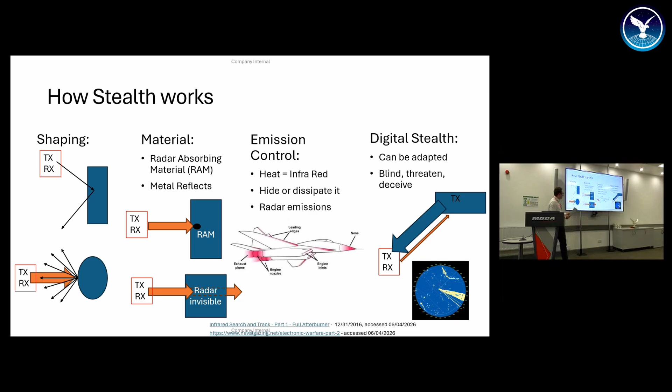And then we get to digital stealth, which is moving away from physical now. This is quite interesting because it gives you the ability to adapt. If you imagine you're in a dark room and someone is shining a laser at me, if I were to shine a bright torch back, you don't know how far away I am, you know the direction, but you can't range me. Or the only way that I'm going to find where you are in that room is where you're shining that laser from. So if I threaten you, you've got to switch it off. And therefore, you can effectively stop people from seeing you.

Why is this happening anyway? Because if we go back to World War II, radar improvements were advancing so quickly and so well that the 1946 Kármán report in the US said there were no means possible by which an aircraft could be rendered invisible to radar. Yet by 1960, when Francis Gary Powers got shot down in his U-2, conventional methods of beating surface-to-air missile threats were failing. So the CIA and DARPA launched an investigation.

The CIA did this during the Cuban Missile Crisis. They wanted to know how big something had to be for a Russian radar to pick it up. What they did was take metal balloons and launch them from submarines off the coast of Cuba, and monitored the Russian response until they picked it up. Then they knew how big something had to be. That, along with DARPA running trials with radar absorbent materials and on the shape of aircraft, allowed them to come to a figure.

However, the issue here is that, say we were detected 200 miles away normally, and we want to limit that, so they can only detect us at 20 miles. That is a 10-time decrease, but requires a 10,000 times decrease in radar cross-section. That means making an F-15, for example, look like half the size of this piece of paper, which is not easy.

In order to do that, many manufacturers were still using clay at the time, or wood, to model prototypes, but computer modeling was the key. But to do those models, you need the mathematics behind it. And the mathematics come from Russia.

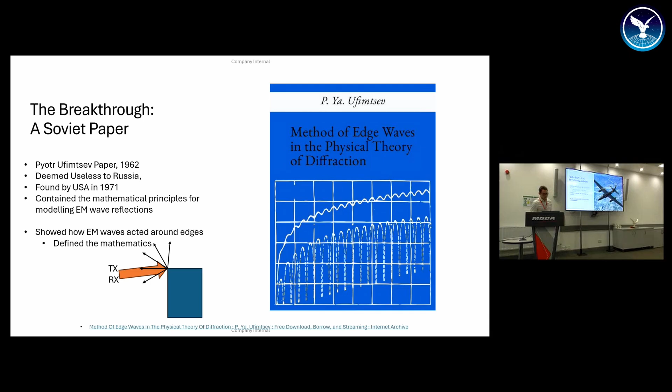A Soviet PhD student called Pyotr Ufimtsev had been studying electromagnetic wave diffraction on 2D and 3D bodies, critically edges. His paper went unnoticed for 9 years until the US translated it and found it to be the smoking gun.

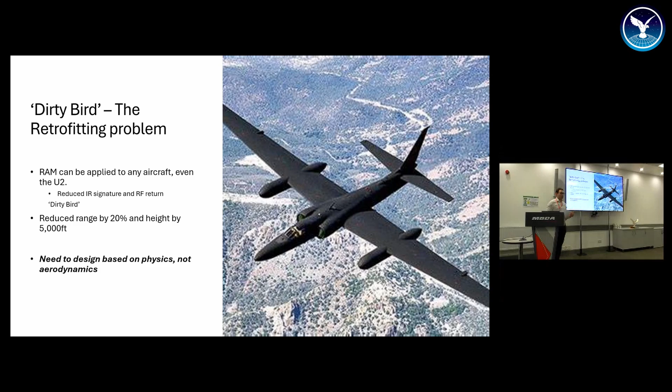But it was a smoking gun because you can't just cover an aircraft in radar absorbent material. You can't take something not stealthy and redesign it. The dirty bird here was a U-2 that was covered in material, and although it did work to some extent, it drastically reduced performance. The key thing that was found was that truly stealthy aircraft needed to be designed based on physics far more than aerodynamics. And that presented an enormous problem.

It's a problem that Lockheed Martin Skunk Works took on, and they created a design using Ufimtsev's theories and computer modeling to build this out of flat planes, mainly because their computers couldn't handle anything more than that. But it was called the Hopeless Diamond, and this had a radar cross-section 1,000 times smaller than anything they had previously designed.

That model was built, and they then took it to the range where they had a pole-off, comparing it to the other manufacturers' models, and it won by a mile. They were so good, in fact, that they even designed the pole it's mounted on, because the previous pole had a radar cross-section far bigger than the aircraft itself. If you look at it head-on, its radar cross-section is the size of a ball bearing.

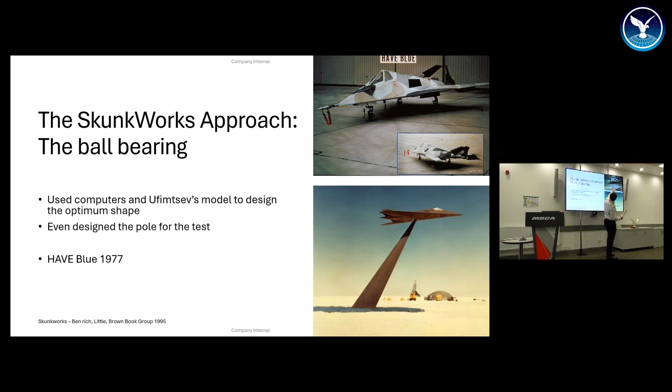That then gave way to HAVE Blue up here, which is the flight test aircraft, and notice the inward canted tails, which hides the infrared signature.

However, that's where the problem started. This aircraft required intensely complicated computers to be able to fly. It required being covered in radar absorbent material, which was expensive and fragile. It needed materials that were still being invented. It needed sensors, and it needed a new way of thinking. Wrap all of that up in secrecy...

...and the cost skyrocketed. It went from 100 orders to just 21 in the end. But this aircraft was a complete representation of all those elements of stealth for the first time.

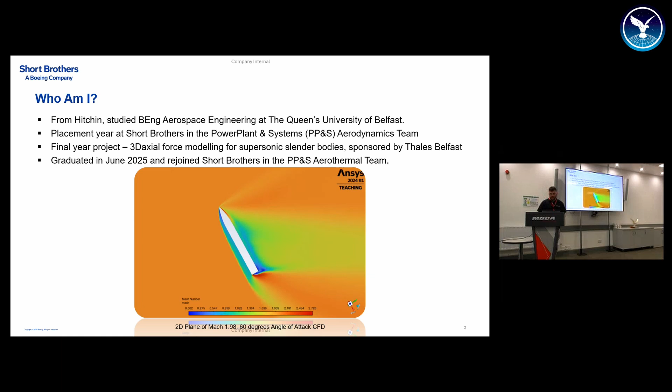So ablation - what is it and what is it used for? It's a charring material, so it's a form of thermal protection. It's an expendable thing, so it's mostly used on single-use aircraft, whether that be spacecraft.

For example, the Artemis II has a lot of cork based around the core stage, and I've been using a lot of their research and papers to help with my modelling. So it's a good link into what's going on in the world at the moment.

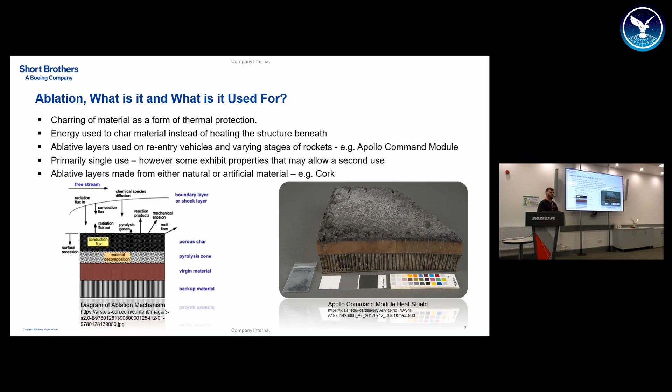Even though it is charred, it's still very thermally and structurally sound, so it will shear off with wind, as we'll get to in a bit, but it can remain on, and the char itself retains quite good thermal properties. So you don't just want to burn it all off - you want to keep as much as you can, because looking at some studies, the char itself can have better thermal protection qualities.

So this is what I've been doing: ablation modeling and difficulties.

I'm using ANSYS Thermal Desktop, which is what NASA used themselves - they've had a massive hand in helping develop it. Artemis II uses that too, and I've been looking at that. It's been quite cool to see it launch and see all their research go into real life.

There are two approaches: the Arrhenius equation and heat of ablation. The Arrhenius equation is a rate of change where K is...

It's not something you can just know - you have to find it out, and that's the same with heat of ablation as well. You've got the overall flux in over the mass rate change. How do you know the rate of mass change? You just have to - experimentally is really the only way you can find it. So in order to validate my results, which I would do experimentally, I first have to have experimental results. It's a snake going after its own tail.

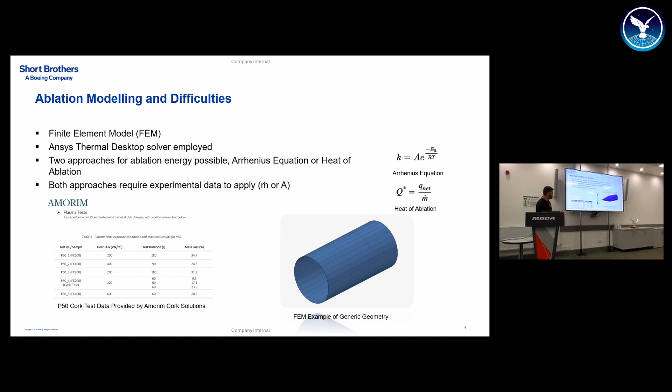So I was looking at 20 mil originally, so different thicknesses. 20 is a sort of nice thing we want to look at.

So we're looking at hypersonic conditions here, Mach 5. The free stream temps are in the region of 1300 Kelvin, so a very inhospitable environment, but thankfully it's not at the point where the gas starts to break down and ionize. There's not all these other bits we have to look at.

So we've got recovery temperatures - that's taken from the free stream temp, and then after all the shock waves and stuff at the front, and then we've got three skin areas. So I had 3: the tip, about a couple of inches of that, and then the cone I made, which have different recovery temperature and heat transfer coefficient, and then the main cylinder of the body.

But yeah, it's just generic, so anyone with an interest can go home and work this out if you've got access to the software.

So the way I did it is, I've got a diffusion node inside, so that's to measure internal temps as well. So I ran it for 10 minutes, and as you can see here, it actually doesn't ablate that much at all. So for 10 minutes, of which a good chunk of that is at hypersonic conditions, we're only getting 1.2 millimeters of ablation, which is quite good, really. Didn't expect it to be that good.

It makes it look like you don't need as much cork as one would initially think. If you're going 5 times the speed of sound, you'd think that's not possible.

But another thing I should mention is, with the software, you can't simulate all 3 layers. It either has ablated and it's gone, or it's not. So that requires some thinking as well.

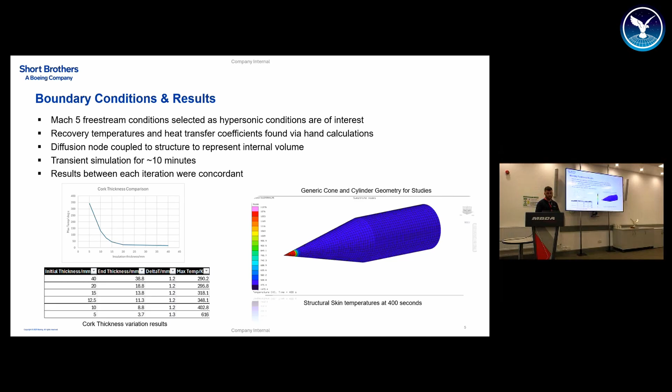So you can see here as well, I'm quite glad my results were concordant. We have been looking at doing some fire testing - pretty much just getting a sheet of metal, sticking some cork onto it, setting it on fire, and then seeing how close our results are. But the only way to really prove it is we have to make something like this fly, which this is all R&D really. There's not much I can do about that yet.

So the validation results I've touched upon, and the in-house testing. The plan as well, is you can couple it with computational fluid dynamics.

For anyone who doesn't know, CFD is a form of partial differential equations used to resolve fluid flow throughout a domain. I quite like doing CFD, I've done a fair amount of it, but I've never done hypersonic CFD. That presents a whole other thing, and I could speak for hours on that.

Having spoken to developers back at ANSYS, because we use them a lot, a good method would be to model that as a generic cone, and then extract the results, like the heat fluxes at the skin, and map that to my cone. Fluent also has ablation built in itself, but that requires some extra things you need to buy, and ANSYS love money, so it'd be a bit of argy-bargy to get that. But the most important thing is, will the mechanical properties allow it to work properly?

This is from one of the papers NASA put into the public domain about cork testing at the hot gas flow facility. It was looking specifically at P50 cork, that's Amorim's one, where they bind it with a phenolic binder. So it's essentially a big glue with 50 micron particles, made as a sheet or into the shape you want.

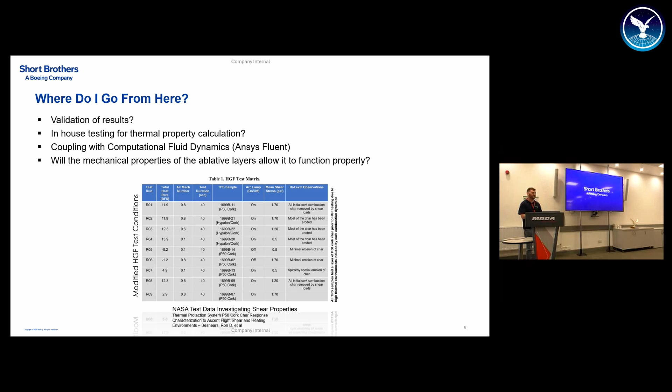Sounds like a design activity, as always with design it's a complex trade of competing effects and influences. On one hand you've got a protective layer that has to a degree react to those surface temperatures to provide a level of protection, but you've also got to try and put the covering on and ensure the covering itself will survive the initial flight. In terms of your work going forward, how do you balance those trades? You mentioned the modelling, does the modelling cover both of those phases adequately? Is it always going to be a combination of some modelling with confirmatory testing? I'm just curious how that interplay can be worked through.

Generally, overall authority relies with the design team, so I would take my thermal recommendations and they will see what they can do with it. At the end of the day, it has to be testing, really. There's no modelling as good as it is, it's a good slave but a bad master. You should never look at something you've modelled and take it as gospel, 100% correct, because we've seen little bits of errors creep in via different modelling methods, especially with the CP of air for example. We've taken it back to ANSYS and said something's not right here. So at the end of the day, it's testing that we have to do, modelling will only get me so far.

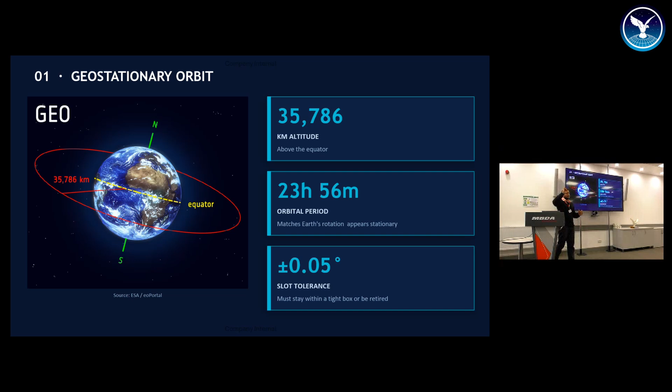The orbital period in this orbit is the same as the rotation of the Earth, so you're constantly above the same point. Satellites in this orbit have to stay within a slot tolerance of 0.05 degrees latitude and longitude. What that means, I'll show you in the next slide.

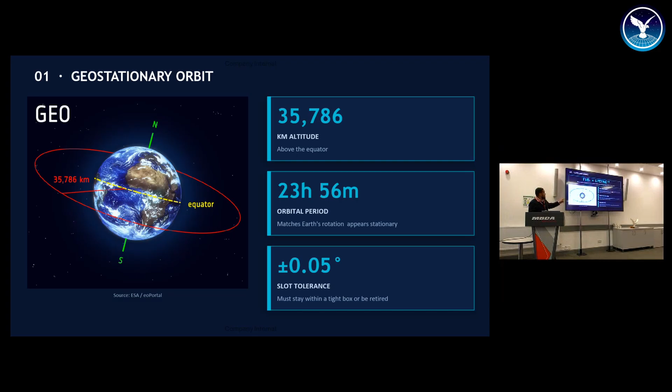Basically, each satellite has to stay within a certain margin. If it strays out of that margin, it's not acceptable normally by convention, but legally it's all right. But everyone likes to stay with conventions.

So what limits life in space? Fuel. Satellites in space, when they run out of fuel, must be deorbited. How they're deorbited depends on where you are. In geostationary orbit, they need to be graveyarded, meaning pushed 300 kilometers out and just left there.

The reason you reach end of life is because you're using fuel for station keeping—small maneuvers to keep the satellite within its slot. You might wonder why these maneuvers are needed: it's because the satellite doesn't actually stay within its slot, it gets pushed and pulled by two different things.

First, the Earth. The Earth isn't a perfect sphere—you might think it is, but it's not. It's actually quite lumpy, and because of these lumps, the satellite gets pulled toward higher gravitational areas, which causes it to move east and west.

There's another thing: the sun and moon also interact with your satellite, pulling it north and south. So you need to do north-south maneuvers, which actually take up most of the fuel. That's why geostationary satellites last anywhere from 5 to 15 years, depending on the mission.

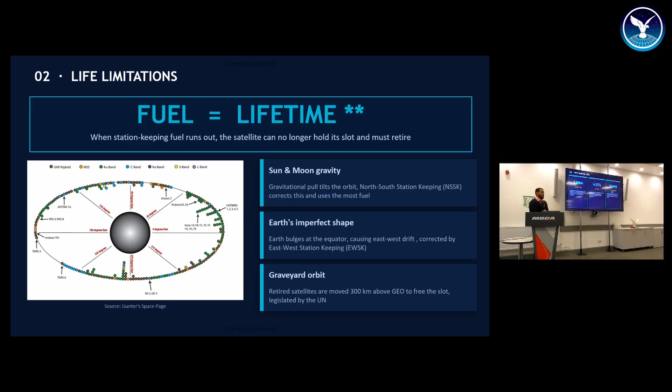So you might wonder, why not just graveyard it? Why do we want new satellites? The reason is one geostationary satellite can cost anywhere from 250 million to 500 million dollars just to build—that's a lot of money. So when you build these satellites, you want to maximize your revenue, and revenue from a geostationary satellite is also a lot.

You can make up to 200 million, even more, depending on what your geostationary satellite does. That's a lot of money. So increasing the life just by a couple of years means you're making hundreds of millions of dollars, that's one great reason.

Another reason is, if you remember the slide before, there's slots. Geostationary orbit is actually really small, only 150 kilometers wide, so it's not that big. You really want to keep your slots, because if you don't have a satellite in your slot, someone could come and take it. It's free for all if you leave it empty. So you really want to keep your satellite up there until you can either send one to replace it, or just keep it up there if it's working and find ways to keep it going.

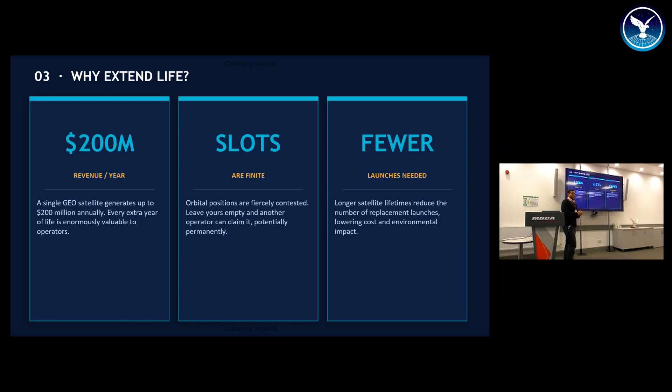Also, launching satellites is not great for the environment. There's a new push in the space industry to minimize space debris, and when you send a satellite into space, there's always a bit of debris and you don't want to do that. So just having it up there is great. Also, launch vehicles aren't great for the environment either, so you want to look into that as well.

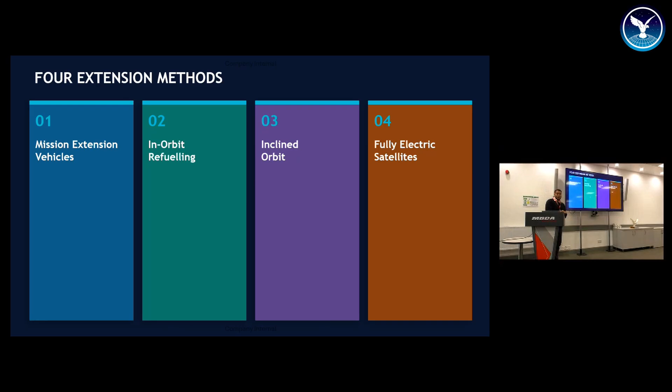So now we're going to be talking about our extension methods. There are 4 that we're going to be looking at: mission extension vehicles, in-orbit refueling, inclined orbits, and fully electric satellites.

Okay, so the first one, mission extension vehicles. What's a mission extension vehicle? Think of it as a tow truck. It's a small satellite that goes onto your bigger geostationary satellite, and all it does is handle your station keeping. It doesn't interact with your payload. Your satellite is operational, but it doesn't have to do any of its maneuvers, including the north-south maneuver, which takes up most of its fuel, and the others as well. It's great because it can slot onto your engine nozzle, and it just works.

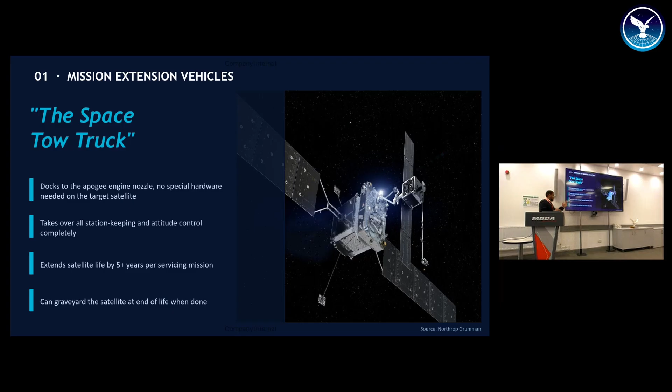This has actually been tested by Northrop Grumman in 2020, and it completed its mission. One of these satellites, the mission extension vehicle, can stay for 5+ years and do all the maneuvers. So 5 years of revenue is great. And when it's done, if your thrusters don't work, it can also do its end-of-life maneuvers, putting the satellite into graveyard orbit, and come back and carry on with other satellites. So one of these vehicles is great for the industry.

Another one is in-orbit refueling, which is actually a proposed mission by Orbit Fab. I use it because this idea is quite cool. Basically you're refueling your satellites. Right now there are services where you can send fuel up and refuel your satellite, but this one is literally in space, and your satellites come to it, or it goes to your satellites, and you can refuel. Now you have a satellite that can go on indefinitely until its components break, which might take longer than running out of fuel.

And it's great because now you can do whatever you want with your satellite. You're not conserving any fuel, you can do all your maneuvers. Now if there's debris, you can move out of the way. And you can even maybe move orbit slots if you get that.

Which is also why this is important - does anyone know about Starship? Starship is a rocket that SpaceX are trying to make. What they want to do is launch it into space empty without fuel, and then refuel it in space. But there's no gravity in space, so to refuel it they have to use centrifuge forces and special pumps, which is quite challenging. It's been tested quite a lot though, so it should be all right.

The next one I'm going to talk about is inclined orbits. What inclined orbit is, is quite simple - you just stop doing the worst thing, which is your north-south maneuver. That means your satellite starts shifting up north and south, as in the name, and it shifts about 1 degree a year. This is great, and it's actually the most used mission extension method right now because it's easy - you just stop doing a maneuver. So what happens is that you're no longer actually in geostationary orbit, you're in inclined geosynchronous orbit, which means you actually have a figure-of-8 ground track.

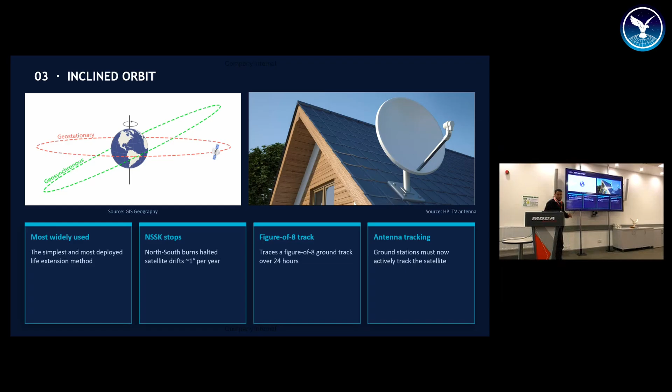It's going to get a bit technical now. Also, because you're not in geostationary orbit anymore, you have to reconfigure your beams because you're not perpendicular to Earth anymore, you're at an angle. And that needs beam reforming, which is actually just simple recalibration.

But there's a bit more complexity. So when you're inclined, you want to be pointing at the equator for maximum coverage, but you're actually pointing at the center of the Earth. So you need to apply something called a harmonic bias.

A harmonic bias basically is where you spin your momentum wheels, so you're pointing at the equator. So now your limiting factor on how inclined your satellite can go is these wheels - how much momentum capacity do you have, so you can spin your momentum wheel so you're pointing at the Earth.

There's actually ways to increase this. One is you can use your redundant systems, or you can actually reduce your momentum you use for your maneuvers, and use that for your harmonic bias, so you can increase the duration of your mission. This is a trade-off that different companies will have to look at.

Also, another issue is that if you get, let's say, all the way up to 55 degrees, you might no longer be able to see your geostationary satellite because it's really a big angle. So that's something to consider when using inclined orbits.

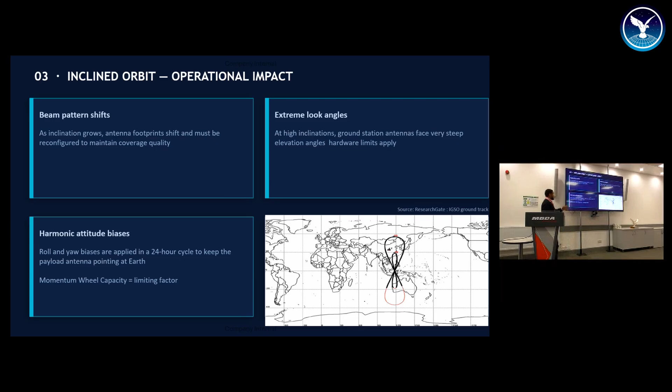The final one I'll be talking about is fully electric satellites. So in conventional, olden satellites, almost half of your mass is used on fuel. That's not great at all, because fuel is very bad at burning - well, it's great at giving thrust, but the efficiency is horrible.

With electric propulsion, you can get almost 10 times more impulse per unit than chemical. So now the industry as a whole is actually moving towards fully electric satellites, and that's why you want to use that. However, there is a trade-off, because now your thrust is much less.

So to get to geo orbit, it takes a couple of months instead of days or weeks. Electric propulsion still actually uses propellant - it's xenon, and so that's still a life-limiting factor.

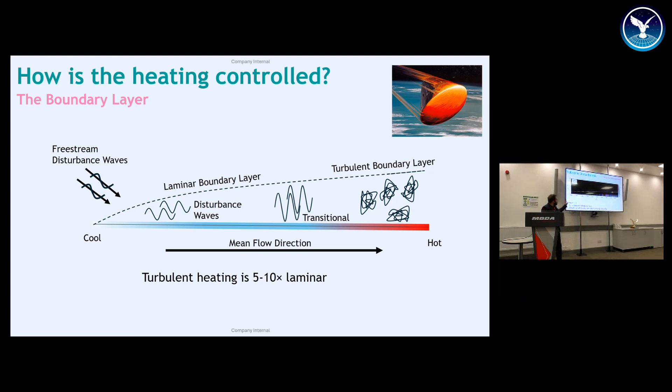Now, in subsonic disturbances, there's only one dominant type of wave that can exist there. There's only one. It's simple, predictable. It starts off quite weak, it grows, it then trips the flow into turbulence, and it can decay. These are very well understood, we've understood them since the 50s, 60s, and it's just called a Tollmien-Schlichting wave. But there's only one. Now, in hypersonic boundary layers, the situation is somewhat different.

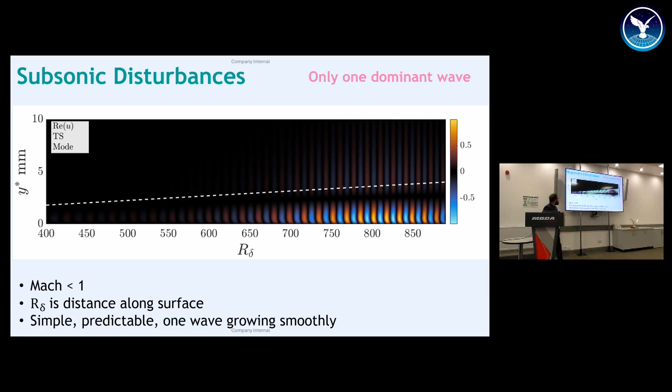But because there's two waves, these waves can interact, and this interaction drives growth that eventually will drive transition and blow the laminar flow up into turbulent flow, which is bad. So how can this happen?

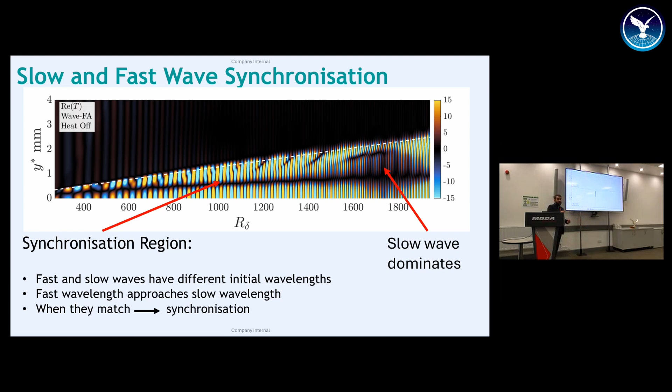This is actually what happens when you have real physical phenomena, but this is just a simplified model. Now, it's similar to some of these resonance problems.

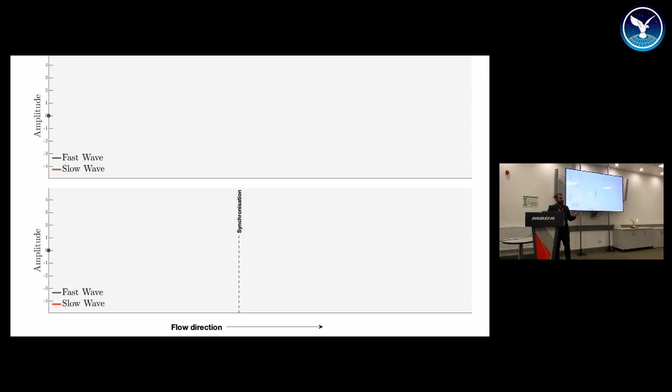So I think that's just a really interesting piece of physics. I find really exciting. I don't understand it, but I hope you do.

So what is next? At Imperial, I developed computational methods to try and track these disturbance waves, see where they grow and see where transition happens. And we do that on multiple different aircraft. Cones, we've recently worked with DSTL on the Swift model. I've got some pictures if you can see, and some of the UCAV data. So that's some of the work that we do.

If you're an engineer, you care about this because you want to understand where transition happens, how it happens, and if it happens to your aircraft. So we can now compute this, but the question is, can we control it? Thank you very much, everyone. Any questions?

I was kind of wondering, what's the physical effect then of these kind of resonances, where you get this massive increase, like a chirp, for example, and the amplitude increases substantially. But what does it actually mean? You've got a surface which is heating up tremendously. What is the manifestation of that resonance effect within these hypersonic waves? What does it actually do to the object?

So what this does, and all the calculations here were linear, so these disturbances were really, really small. So what this synchronization will then lead to is real finite disturbances that we can actually see and model in experiment. And they actually then build and change the nature of the flow and cause turbulence. So if a flow goes from laminar to turbulent when you don't want it to necessarily, well, in subsonic flows, it increases drag. In hypersonic flows, it can increase heat.

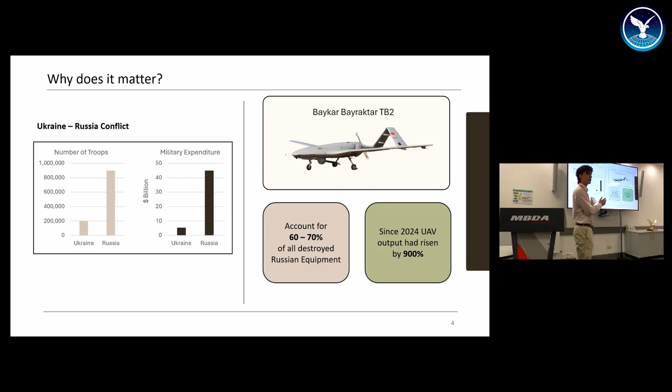So we touched on what Edge AI actually is - it's on local hardware, downloaded on that local hardware and put into a system. We briefly went over why it's important, where the industry believes the technology is heading. We looked at the current conflict in Ukraine and Russia and how important uncrewed aircraft have been for Ukraine's defense, and we briefly looked at the architecture, the hardware side.

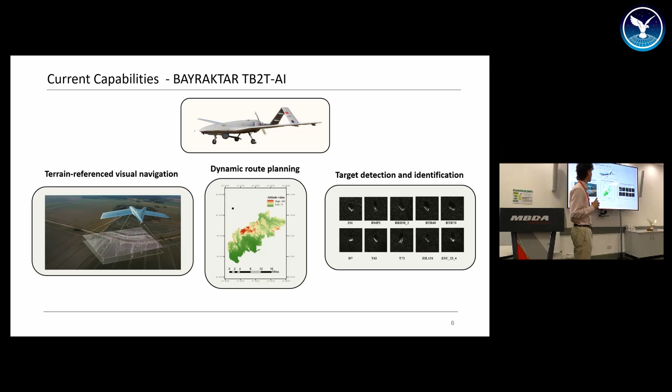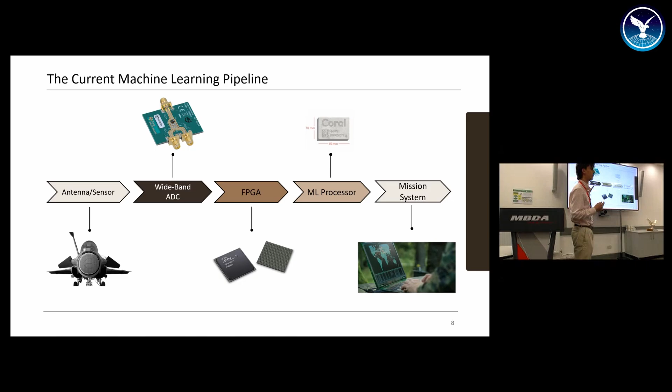We looked at current capabilities - terrain-referenced visual navigation, dynamic route planning, target detection and identification, all controlled without a human. We spoke quickly about how we're going to upgrade the electronics inside these systems, looked at the machine learning pipeline, what's currently in use, and then looked at the bottleneck and the machine learning problem with the hardware currently in use and why we can't use it for the whole system.

And then we looked at SWaP constraints - the NVIDIA Blackwell chip GPU, which could handle terabytes a second of data but takes 1,000 watts of power. So now onto the bit that was missing: training edge AI models, which are going to be more important. Next slide - neural network training.

This is what we call an open loop algorithm - the model is trained on a fixed data set before flight, and that data set doesn't update at all during flight. Whereas in defense, where we have limited data, we don't know if countries are using all of their equipment until wartime starts. We need a closed loop algorithm, which learns and updates based on experience during a mission. So how do these closed loop algorithms train on flight?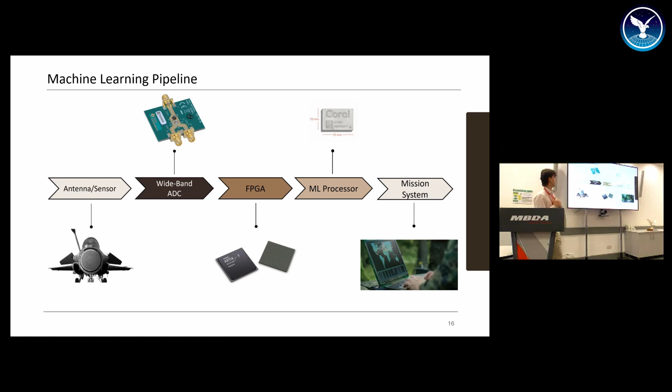So unknown objects can be identified by association. Yes. So what's the future direction? Next slide, please. So we looked at the machine learning pipeline.

Next slide. Ideally, we take out the FPGA, this bottleneck to the machine learning processor. The hardware also needs to improve. So currently, this machine learning hardware—one thing that's being looked into is photonic hardware. That's using optical waves rather than electrons, photons rather than electrons, to process information.

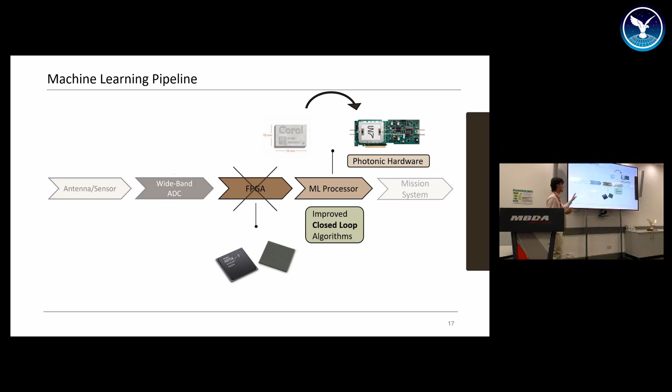And then we need improved closed loop algorithms. With an increased number of sensors and sensor resolution, we'll have more characteristics where we could plot these objects on that transformer embedding we spoke about. The problem with closed loop algorithms in a defense context is because they're updating during flight, and a human isn't in the loop, we don't know how they're going to act after a long mission. So they're very hard to test, validate, and get certification for. That's why it's very hard to have these closed loop algorithms put into these systems at the moment.

Next slide. So just to summarize, these were the current capabilities that we have on uncrewed aircraft or drones. Next slide.

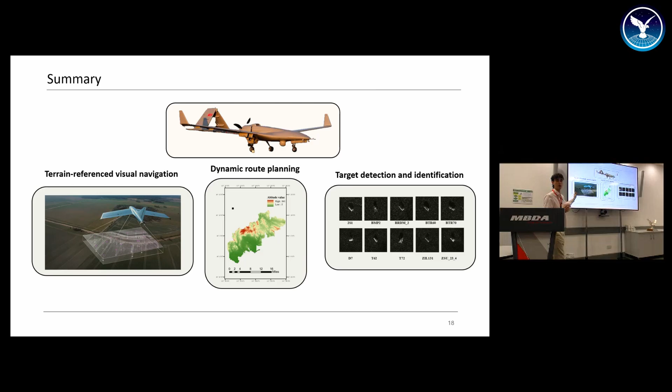This unknown threat detection and identification will feed into every section of operation that we have at the moment. For example, dynamic route planning: if we spot a radar we've never seen before, or we don't know it's a radar yet, and we plot that on the transformer embedding very close to another radar, we can make an educated guess that it might be a radar, and update the route to avoid it. That's just one example.

Next one. While most of the information I got was from talking to researchers at Leonardo looking at machine learning and implementing it into technology at the moment, I did put down a couple of sources for information I got in some of these slides. Thank you very much.

But please do ask any questions.

Your description passed over quite a few different techniques in there. You talked a little bit about machine learning, large language models, artificial intelligence, and I think some of the applications seemed a bit more like ecosystems to me in terms of the way they've been developed. So based around a variety of applications that a future aircraft is likely to encounter, do you see all of those techniques in some way playing a part? Not just Edge AI, but a collection of different techniques being variously applied. Maybe you could tell us a little bit more about your thoughts on that.

So the big question, why bother in the first place? To put that simply, for the most part it comes down to reducing cost and saving time along with safety. Overall, resupplying tools, parts, and bits that break to the International Space Station costs a lot of money and a lot of time. Being able to print it in space instead of taking months and millions of pounds, it will take a day, an hour, and the material cost of bringing it up there.

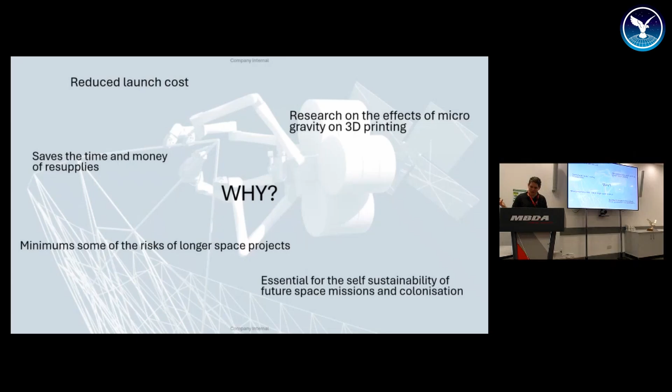Of course, there's also researching some of the effects and minimizing some of the risks on longer space missions where you won't be able to get resupplies. And of course, deep into the future, being self-sustainable on other planetary bodies.

So starting at the very beginning, the 3D printing in zero-G experiment project started in 2014, done by Made in Space. Overall, it was an FFF printer, essentially like most Earth printers, where filament is printed out, heated through a nozzle, and built up layer by layer to build a structure. The material used was ABS.

Some of the things that were printed included the very first thing ever printed in space, a faceplate of the extruder printer head, some calibration prints, a few test prints, a few useful objects, and this—the ratchet wrench. This is special for two reasons: it's probably the first tool ever printed in space, and the first 3D print that was sent from Earth to space.

All the other prints before were downloaded directly onto the printer. So this shows the capability of doing a lot of the work from ground control and then just printing it out on the International Space Station. These samples were taken back in 2015 and compared to some of the Earth prints done.

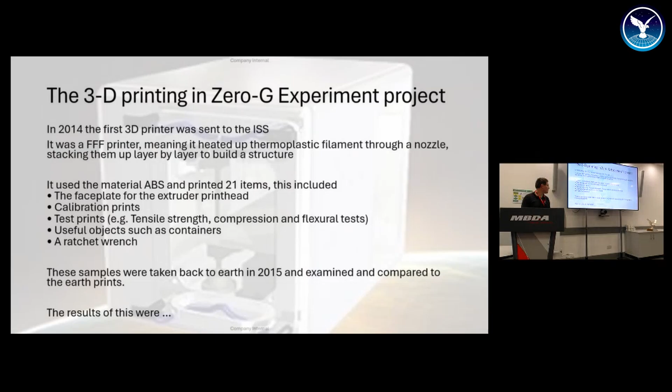The results of this were, overall, pretty anticlimactic. There really wasn't much of a difference between density, mass structure, strength, or compression. There were a few differences in some of the first tests, but this was mainly due to a miscalculation with some of the print settings and calibrations. Further testing was then done in 2016 that then proved there really wasn't much of a difference.

The main reason for this is due to some of the properties of FFF printing—most of the effect of the print actually comes from adhesion to the plate surface, not gravity itself and the properties of the materials. When you're controlling the extrusion temperature, it comes out at a stable rate and cools down. The viscosity of the material is quite thick overall, a bit like honey, so it will stick to the plate fairly easily even in zero-G, and won't come off due to surface tension. As it goes on to print the next layers, it will heat up the previous layer and join them together. So overall, it kind of works the exact same way.

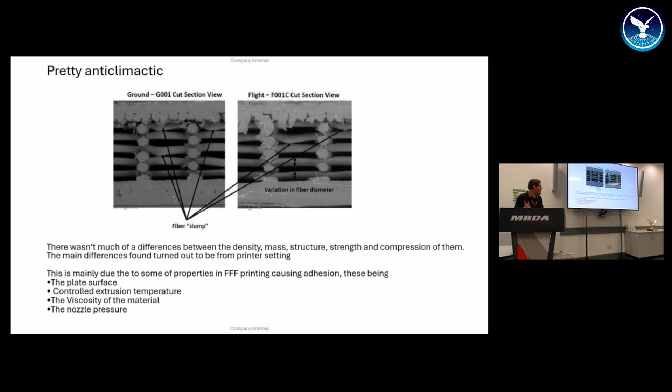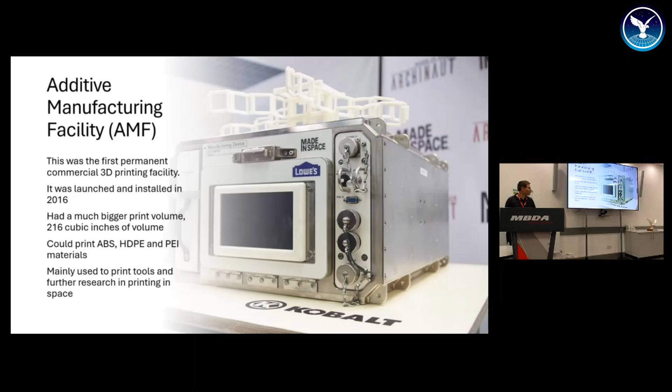So later on, the AMF was sent in 2016. Essentially this did a very similar job, just with a larger print volume, and was also going to be a permanent installment. So instead of testing, this was actually being used properly by the astronauts. It could print in several materials as well, and was mainly used to print tools and for further research in 3D printing in space.

So getting on to an interesting topic: why would you bother 3D printing bioink in space? Overall, the main reason for printing with a biofabrication facility in space is due to the fact that on Earth, a lot of the structures you'd want to make, such as vein systems and whatnot, wouldn't really be possible due to them being hollow and having small overhangs, so they'll collapse under their own body weight. While in space, you don't really have that problem in microgravity.

So a lot more of these structures can be made, which can then be built up into realistic organ structures. Also, the cells themselves suffer less compression and less distortion, meaning more cells survive and you have more successful prints.

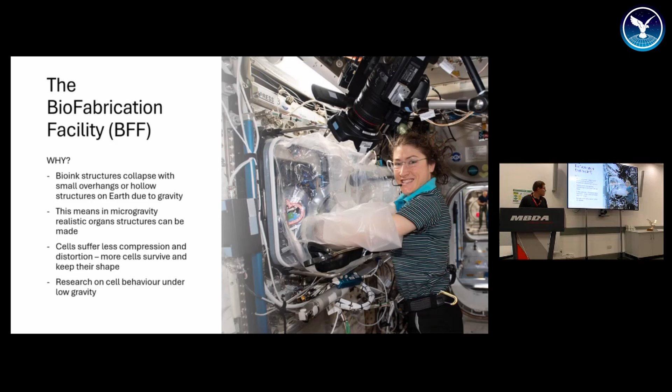So this wasn't the first bioprinter in space. The first one was in 2018 by a Russian company, which used magnetism in some way, but that was on a very small scale. While the BFF actually is still in use today, unlike that, and has printed more impressive stuff, so I thought I'd talk about it.

Essentially, it uses bioink for printing. This is a gel blend of cells and carrier material, this carrier material usually being hydrogels, which was used as scaffolding for the living cells and to protect them as the structure grows.

It works by loading the bioink into a print cassette. This cassette is then loaded into the BFF. The molten bioink, when I say molten, I just mean in liquid form. It wasn't heated up because that would kill the cells. It was then pushed through a nozzle, which then presses the layers together. Once this was complete, it was put into an incubation hut, which you can see next to it there.

In its first mission, it printed part of a knee structure and a large volume of human heart cells. In 2023, it managed to print a full human knee meniscus. Next slide, please. Sorry for my pronunciation.

Right, you'll notice the first metal 3D printer in space came up thanks to Airbus. There's a few of them in the front. Over 10 years after the first plastic one.

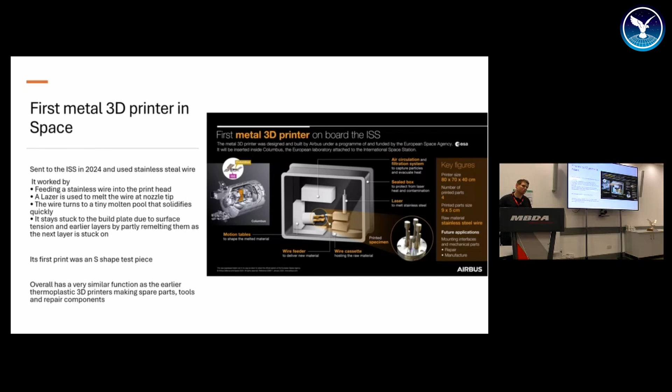So essentially, it used a laser when it pressed stainless steel into the plate. Then it would actually melt into the plate itself and build up layer by layer. First print made by it was an S-shaped test piece, and overall it has a very similar function to the earlier thermoplastic 3D printers, but of course it's a lot stronger and can handle a lot more pressure.

Next slide, please. So the future of 3D printing, some stuff to look out for. The RRP is essentially a mission to use lunar rock or other planetary surfaces as 3D printing material. This would then eliminate the need for resupplies in the first place at all.

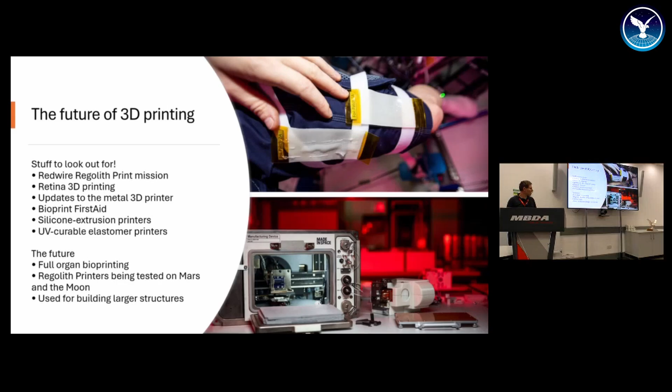I was kind of interested in, where do you see the future for this? Because there's a combination of things in here, like, for example, trying to manufacture spares if there was a failure during flight might be one option. But then some of the bioprinting and metal printing, I was curious as to whether there was perhaps an aspiration that the repeatability of the processes in space would actually be more conducive to repeatability. Isn't that a longer question?

Absolutely. One thing I didn't mention, which I had on one of the last slides, was there's a company working on building retinas. Because on Earth, building up the layers, 3D printing them doesn't quite work because there's too much pressure on them. You can actually do that in space, and they've started manufacturing that at the moment. I think at least they've sent up some prototypes of that. In the future, they also plan to eventually get to the point where you can make full organs in space, so you can send cells up, and then they 3D print an entire structure and hopefully send it back down. Of course, on the more manufacturing side, it's quite handy if you're building a lunar base, essentially, if you can take the material around you and actually build your structures out of that.